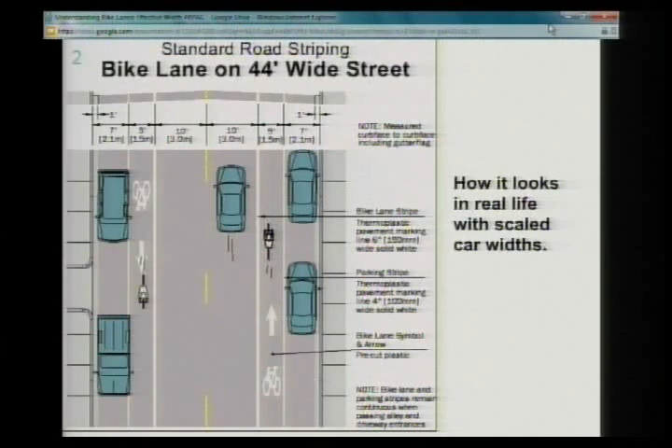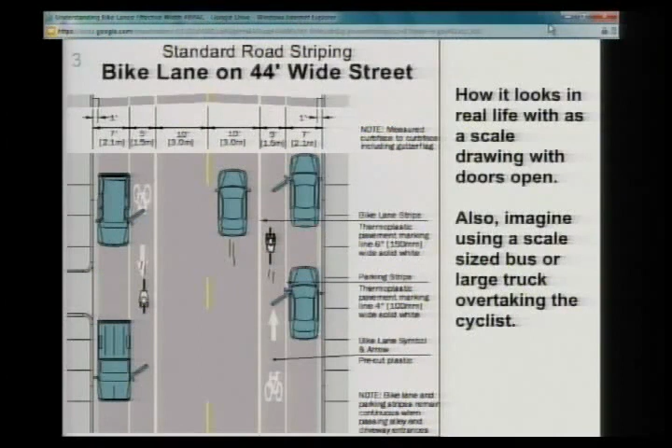I'll go back to how it looks in the guide. What does it look like in real life? The cars are made about 80% too narrow in the guide. By intention, or I don't know why, but that's how it is. If you now open up the doors, you see this, which really doesn't look so good. So you can start with this and say, well, that's a lot of room there. That looks pretty fine. Then you put it out here, and then you put the bike lanes in, and it turns out like this, and it doesn't look so good. This is the AASHTO. The AASHTO also has non-scale drawings. This is the same. They're talking about a minimum.

They give a minimum 7, 5, 10 bike lane. Looks like it has plenty of room, but it's non-scale. The parking lane could be 7 or 8 feet, the bike lane could be 5 to 7. They don't even specify the travel lanes, those could be maybe 12 feet wide. Looks great, oodles of room.

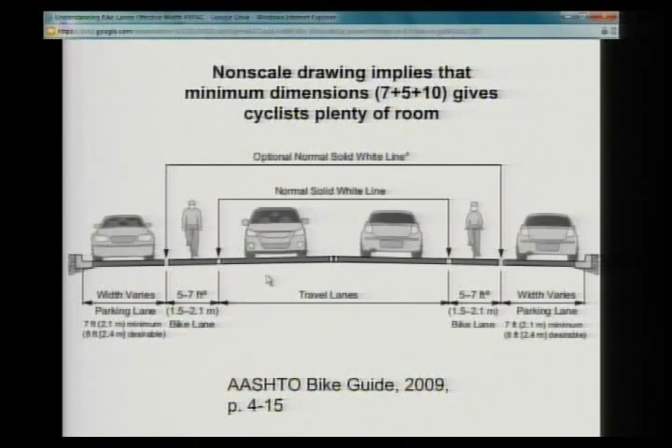But if you actually set up their minimum 7, 5, 10, now why did it do that? I'm going to touch that again. 7, 5, 10, it doesn't look like that at all.

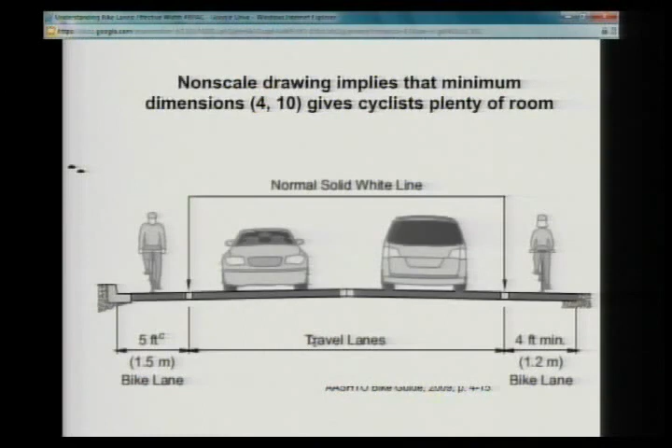This is another situation where they're looking at 5 foot on one side, no parking for on the other. Curious that the 4 feet on the right side look exactly the same as the 5 feet on the other side, which gives it a clue that this is not to scale. And the travel lanes look huge, probably 12 feet here. Looks like a lot of room. This is not a scale drawing.

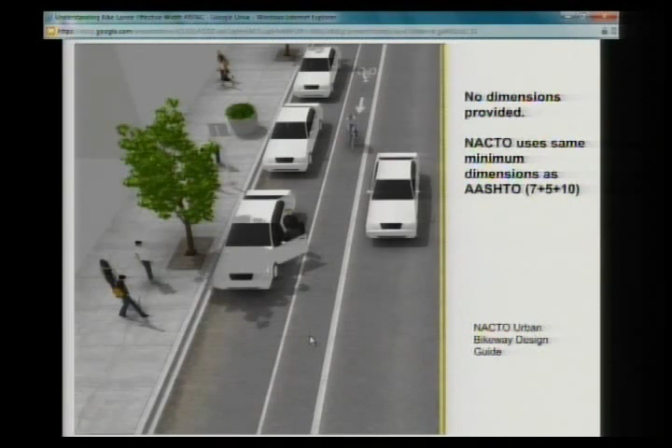This is one of their drawings. Again, they have the same minimum 7, 5, 10, and they give you this drawing, but they don't tell you how wide anything is. And if you go ahead and put in 7, 5, 10, you may be surprised to see that the door actually covers most of the bike lane. So it's really interesting to see that these guides are not to scale. They don't give a good representation of what it looks like on the ground.

What does a scale drawing look like? Well, this is some basic stuff that you need to know to design this stuff. How wide are the lanes? How do they compare to different types of motor vehicles, a mini, SUV, a truck or a bus? How wide is a bicyclist?

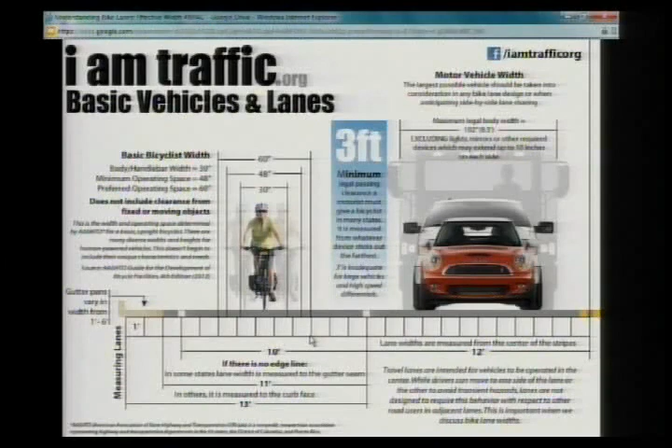AASHTO says that a bicyclist should be 4 feet wide operating room minimum, 5 feet recommended. And if you think about a bicycle being 30 inches wide physically, 4 feet gives you 9-inch wiggle room on each side, which is not a lot of room, even at 4 feet minimum. And they're saying 5. So this gives you some idea of what it looks like when you actually have things to scale. So what does this mean now?

Take a scale drawing of Illinois Street. This is Illinois Street: 7-foot parking, 5-foot bike lane, 10-foot travel lane.

We're going to call the door zone both the strike zone where the door opens, and we'll call the startle zone another 1.5 to 2 feet or so, where even if the door doesn't hit you, you're going to swerve out of the way. A cyclist was killed this summer in Chicago. The door never touched him, he swerved out, got under a truck, and was killed.

So the whole door zone can be pretty wide, about 11 feet will get you out of the door zone. If you look at the general use travel lane, and if you wanted to be 3 feet away from the largest vehicles, you can see that that 3 feet is putting you, there's no room between the two. I mean, there is no room between the 3 feet close passing zone and the door zone.

So if we had looked at something like this, we may not have been so surprised at Illinois, having to ride right on this line to get out of the door zone, and then you don't have any room for close passing. You don't get the 3 feet.

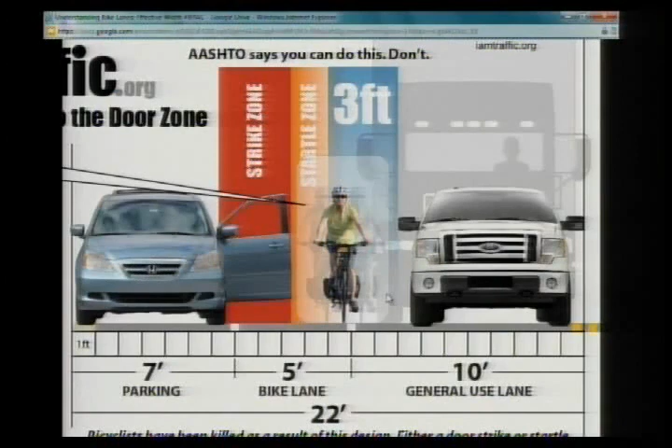So here's the parable. Moses is a graduate student doing civil engineering at University of Illinois, and he comes down because he's heard that it's a good place to ride a bicycle, right? So what Moses does is ride to campus on Illinois Street, east of Lincoln, and he gets to Lincoln, crosses Lincoln, and what does he see? He sees the bike lane, right?

He goes, wow, this is cool, I got a bike lane, this is my own special spot. He's going along, and he's figuring that this is going to be cool. Further down the bike lane, he sees somebody come out of the car, and that door covers almost completely the whole bike lane.

Closing it, he goes, whoa, I guess I need to be worried about doors opening. So Moses says, okay, I'll move over to the left side, stay out of that. Bus comes by him within 1.5 feet, okay? Not fast, but he comes by. Whoa, I see there's things on that side.

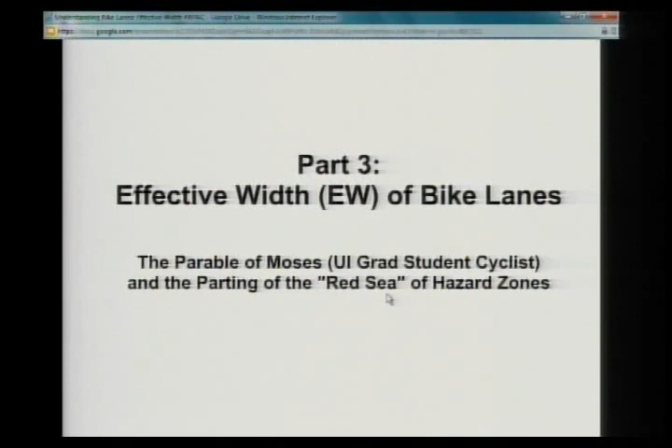So this guy is an engineer, or going to be an engineer, and he says, I want to figure out what's going on here. My expectation is that if I'm in the center of the lane, I should be relatively free of these types of hazards. So let me figure out how much these hazards come in on me. So he looks at this.

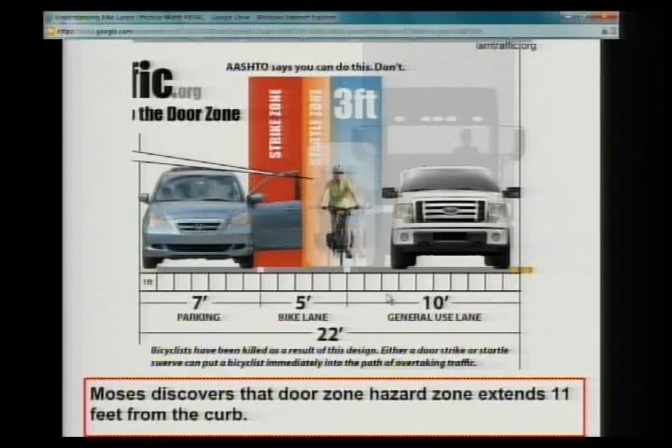Moses discovers that the door zone hazard extends 11 feet from the curb. He looks up the width of cars and vehicles, and does all this stuff. He's a smart guy, he knows how to add and subtract. Not too hard, 7 feet.

He looks at the close passing zone. He finds some scale drawings or does measurements and says, wow, so you actually have that 3-foot distance, right? This close passing zone extends 11 to 13 feet from the travel lane left stripe. So that is, motorists need their own space of at least 11 feet for cars and SUVs, to 13 feet for larger vehicles, to pass cyclists within a margin of 3 feet. They're going to need that much room.

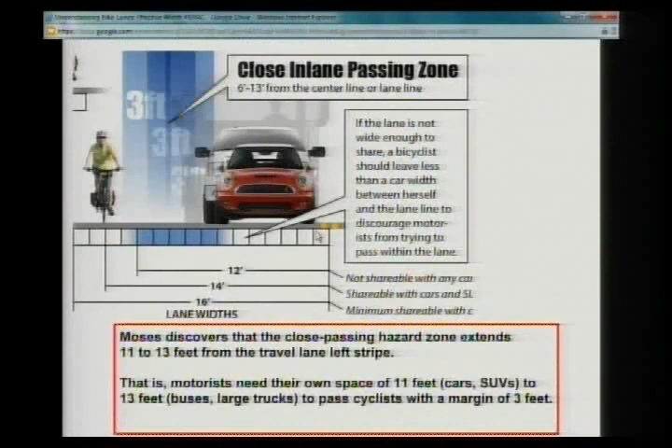So that's what we're showing here. You have to be actually outside of 13 feet if you want to be outside the close passing, or 3-foot passing, for a large vehicle who is right up against the left side of the lane. Okay, so Moses figures this out.

Then he looks at this, to show you that it is really tight there. So here's a bus in the center of the travel lane, and the only room next to him is that 5-foot bike lane. So if you're in the middle of the bike lane, you don't have 3 feet. Now, do you really need 3 feet all the time? If it's really slow, maybe not. But that's the Illinois minimum safe passing distance, minimum 3 feet.

So he figures this out, and he says, okay, I'm going down. On my right, I have the door, right? Where does that come out? Okay, that comes out 11 feet. On my left, there are buses. Where does that come from the left? 13 feet.

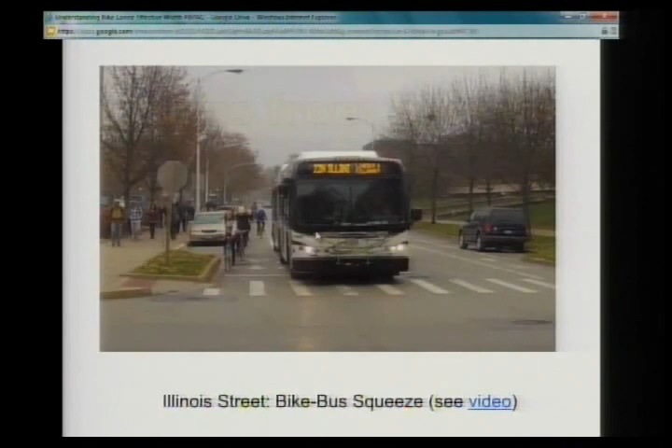There you are, right? Why do we call him Moses? He doesn't approve, he wants to part the Red Sea, right? He doesn't like this, he wants some clear space between the two. So that's what Moses likes.

So he then comes up, well, I'm Moses now, and he comes up with a spreadsheet to see how this actually works out.

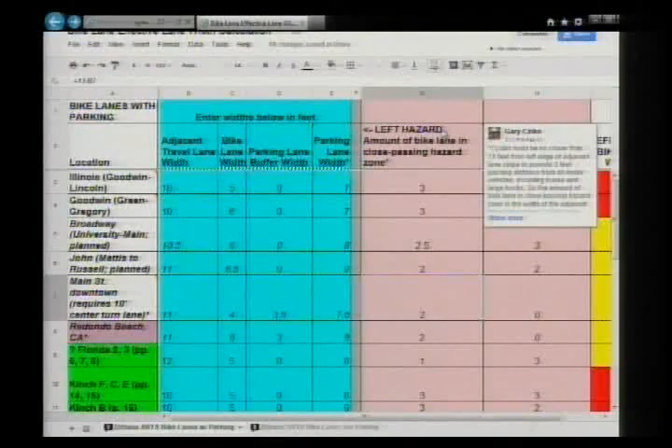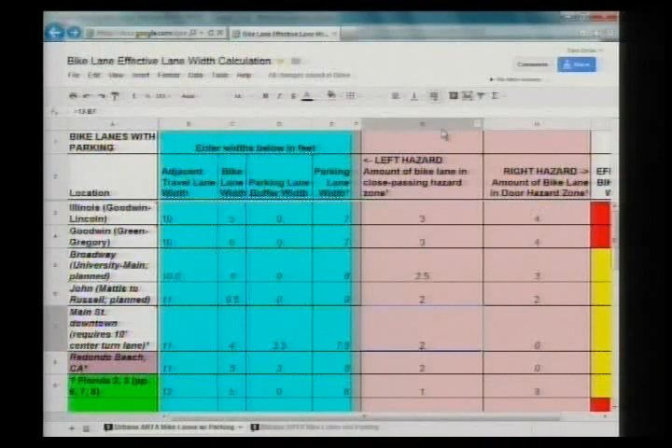I think this works by hovering like that and going like that. So what you can actually do, and it's a little bit too big, we're not getting the whole thing here. So what can I do for that? Idea, somebody? F11? F11 is going to... again? So how do I just make it smaller, smaller, smaller? Control, well, you mean F9 or Control 9? Control minus. Oh, Control minus, sorry. Okay, that's kind of small. Can you still see that?

Yeah, okay. So if you actually put this spreadsheet together, we have the bike lane width we enter right here. We put the adjacent travel lane width next to it. We put any parking lane buffer. We put the parking lane width on the right side, okay.

So what is this left hazard? The left hazard is we need this 11 feet, all right? So, sorry, that's the left hazard. Do I got this right? Sorry, that's the 13 feet, right? We need 13 feet from passing traffic.

How much do we have in the travel lane? 10. We need 3 more, right? So this 3 is going to intrude on the left side of the bike lane. If we look at the other side, we need 11 feet from the curb. What does the parking lane give us? 7. We need 4 more.

Comes at 3 feet on the left side from close passing traffic. We need, from the other side, we're losing 4 feet. The bike lane is how wide? 5. If we subtract 7 from 5, we get -2. That's the overlap in those 2 zones.

So you can put these numbers in, look at it. If we look at Goodwin, it has -1. It's a little bit better. Why? Because the bike lane is a foot wider. If we look at Broadway, this is being planned now with a 10.5-foot travel lane, 6-foot bike lane, 8-foot parking lane.

That's kind of fun. So what does this mean now? If I can get this - where is the other window now?

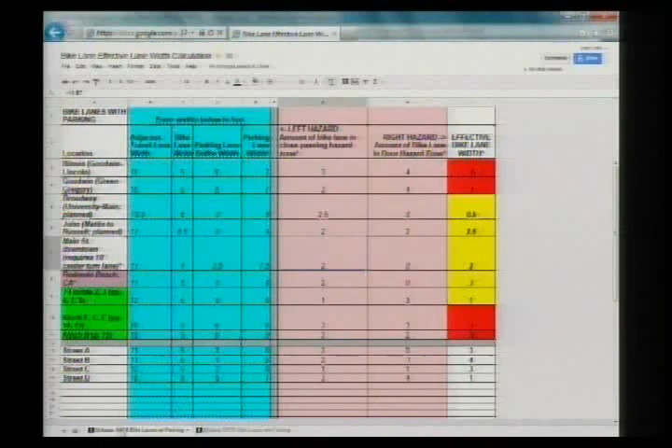Somebody? I won't do this again. I'll stick with my Mac.

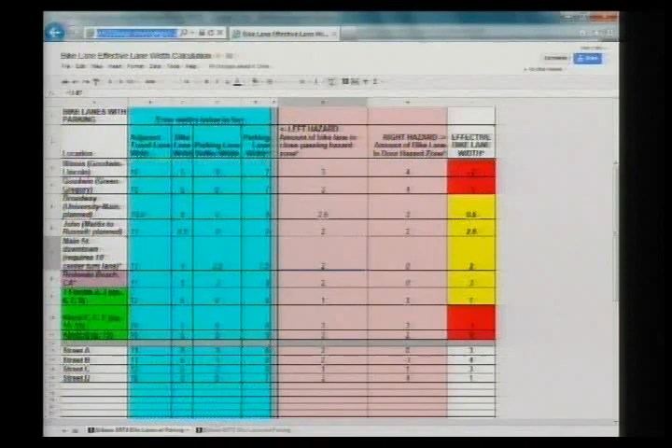Okay, I can just get rid of this one, and it should show up. Okay, so we have that. Thank you very much. So what does this mean?

So what are we going to do with this more scaled, detailed view of bike lanes to see how they actually relate to reality? Are we going to continue to install these double hazard lanes with zero or minimal effective width? Or are we going to look at some other types of infrastructure that creates a more pleasant, less intimidating environment without marginalizing cyclists or directing them to ride in these hazard zones?

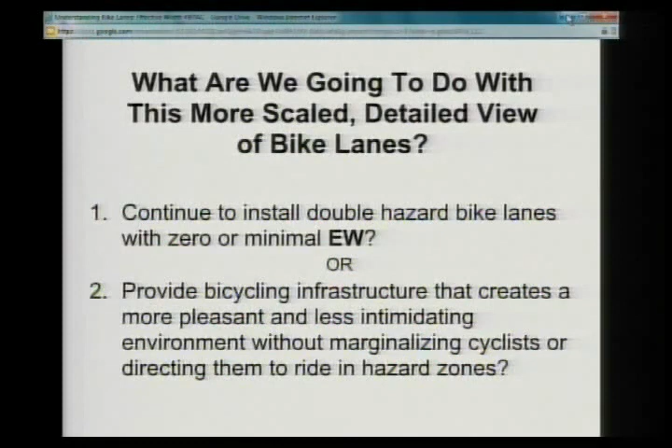This is the type of thing that I think we could do downtown Urbana. Maybe not as much room as this, but close to this, getting people out of the door zone and giving them a couple of feet in the red zone there that they can come through.

What's really nice about that design is that you can pull that buffer away before intersections. Motorists will then be encouraged to go into that lane and merge in to make that right turn. The reason that motorists don't go into bike lanes as they're supposed to when making a right turn is it looks like a shoulder. It's only 3 or 4 feet, right?

It doesn't look very inviting. But if you make that wide, that's one of the advantages. So this is something that could be done here.

We have all these 3- and 4-lane streets coming right downtown. Things like Illinois, or Elm, where there are 2 lanes and they widen to 4 and they go back to 2. Even Main Street and Race. Why not put Sharrows on those right lanes? This is right downtown. It would be great for cyclists and make a statement.

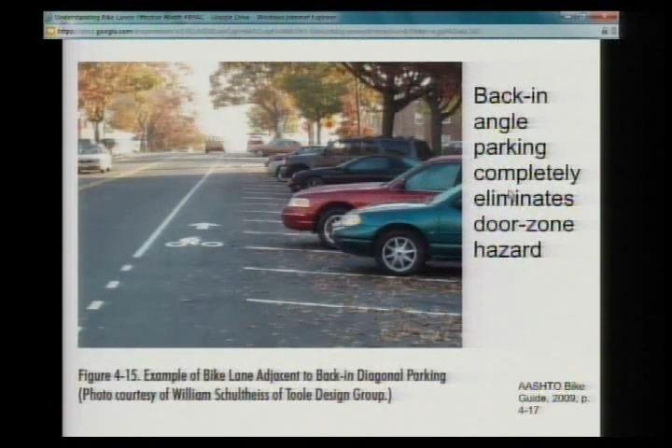Cyclists and motorists can see each other. No door zone. You can remove parking from one side and see if you can actually improve it. I actually consider the door zone more of a problem than the close passing zone, because with the close passing zone, the motorists are seeing you. They may try to squeeze by, which could be dangerous, but they see you. People opening doors don't see you.

Contraflow bike lane: take a two-way street, make it one way. Now, campus is going to be doing this on a number of streets. I think Daniel will have a contraflow bike lane. We should have them on all of them.

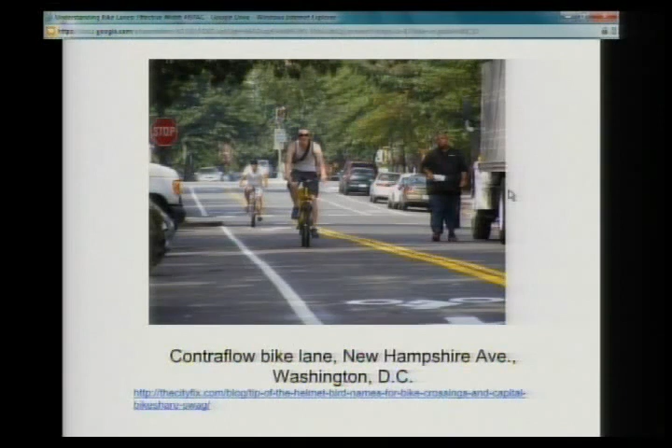You put in a one-way street, I will guarantee cyclists will go the wrong way. They will not go out of their way one block to avoid that street. Motorists do not go the wrong way on one-way streets because they know they can hit bicyclists. So think about making streets one way with a counterflow bike lane, and we get more room that way.

We were talking about this on Green Street between Wright and Lincoln. I don't even know what's happened to that now. They're either still thinking of it, or they're not going to do it. But whether or not, we can come back to that.

Let's make some connections. There are a few places where connections can make a big difference. Now, this is Cynthia's probably least favorite place, University Avenue. This is my second least favorite place to ride a bicycle, going to the MTD offices on University.

40 miles an hour, I can do it, but the only thing I like less than this is Springfield, West Springfield, with 2 lanes and gravel shoulders and trucks coming through. Now, if you go on North Cottage Grove, you can make a little connection across there. Now all these employees can get to MTD without having to go on University.

It's already done at Carl. They have a crossing on Carl on exactly the same rail line. Well, whatever. This may not be the ideal one, but there may be ways to provide access like this. Connections are important. And connections between 2 streets that may have a cul-de-sac, and they can make them come through, things that we can look at.

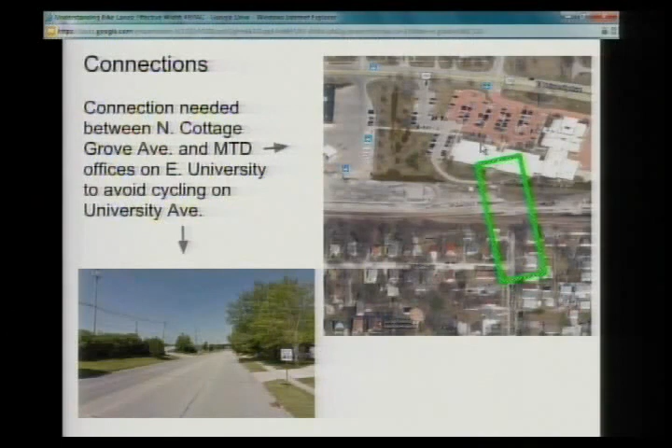This is really my favorite. This is a bicycle boulevard in Berkeley, California. This is really clever. They have this obstruction here, and that prevents cars from coming through, but emergency vehicles have enough clearance to go right through that. So these are streets that you cannot go through, low speed, very low volume, and people just use this.

You see kids, you see everybody just taking over these streets. It's sort of like a ciclovía all the time on these particular streets. People have local access, and the people living there love them. We need some bicycle boulevards. Do they have any issues with people hitting that little curb in the middle? Well, if you see a do not enter with a $75 fine, it should say $75 fine plus repairs.

You mean a cyclist, with a bike? We've actually had complaints from people that were biking accessing our sidewalk ramps where they hit the curbing on the ADA accessible ramps. We've actually had people complain that they didn't feel the curbing was visible enough when they came up. Yeah, and there's a couple of bad places where it's not visible enough.

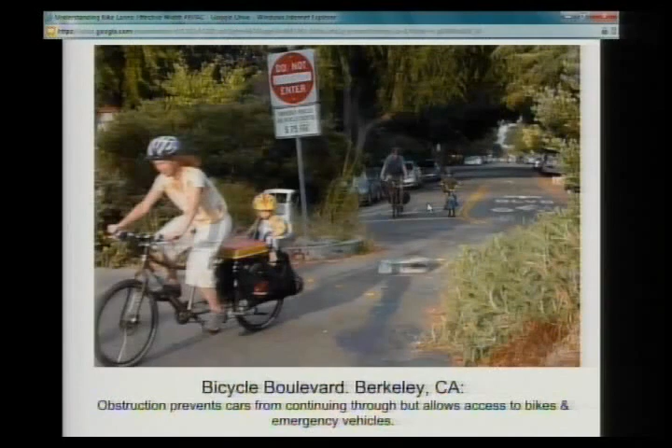Yeah, I mean, you don't necessarily need to have the obstruction. I don't know if Portland uses them, but anyway, they're told the cars are not allowed to go through. You could make it just sort of narrower if you don't want emergency vehicle access as well. But this is something that we could be looking at as well. So what's the bottom line?

Really, I think that when we're considering bike lanes, I'd like to look at this effective width for all of the ones that we look at and see if we can do something to have Moses approach, right? That means to part the two hazard zones here, okay? And you can use the spreadsheet to put the numbers in. You can widen the bike lane, but without narrowing the travel lane, because if you narrow the travel lane, you haven't done anything to get away from the close passing.

You can widen the travel lane from 10 to 11 or 12 feet without narrowing the bike lane. That will give you some more. You could provide a right side buffer against parking or a curb edge without narrowing the parking lane. You could remove parallel parking, replace it with back-in diagonal, take it off one side. I talked about contraflow as a possibility. If you can't do any of those things, then I think it makes sense to provide sharrows on that particular street or look at some of the other alternatives that we've been looking at.

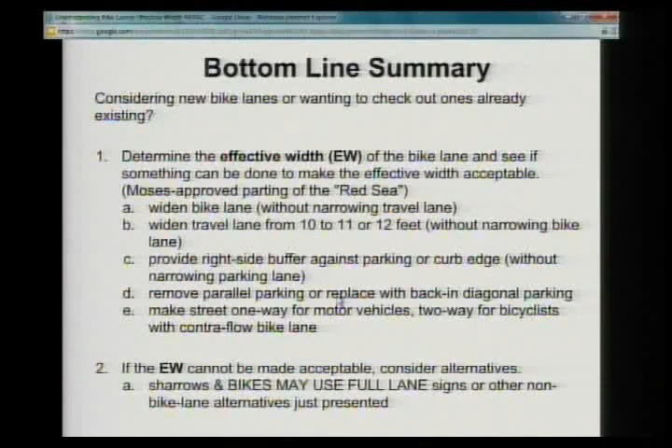So basically, this is a summary of the idea. The effective width should be considered when we're looking at bike lanes. You subtract from the painted lane width. The left hazard is the close passing zone. You look at how wide is the travel lane. You subtract that from 13. That tells you how much you're coming in from the left.

The right hazard is the door zone. How wide is the parking? You subtract your parking from 11. That's how far it's coming in from the right. If there's no parking, you use the edge hazard zone instead, 2. And that's how you get Illinois, 5 minus 3 plus 4 minus 2, Race Street

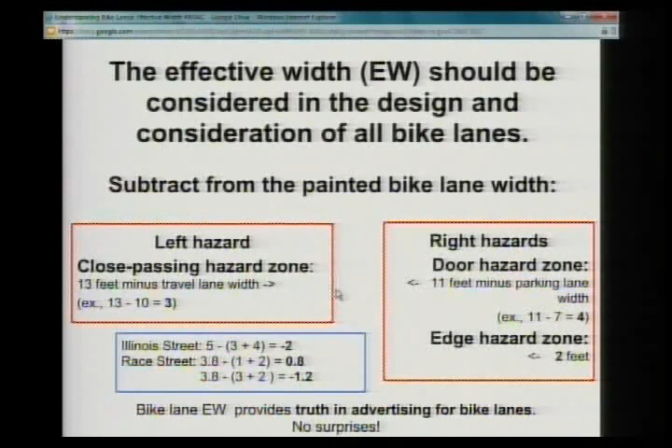0.8 and minus 1.2. So I think this sort of provides a bit of truth in advertising for bike lanes, and there's no surprise. So I'm offering you this metric, and I'd like to see us use this to give us a more reality-based view of what we're doing. Any questions? Any questions for Gary?

Sorry? The edge hazard zone. Yes? 2 foot. Is that everywhere? Well, I'm putting it in here because there's a lot of stuff that happens at the edge. I mean, that's where you get glass and you get debris. That's where you get ice. That's where you get snow.

And, I mean, if you had a street where the gutter seam comes out, and from that point the pavement is in great condition, right? And the city's going to maintain it and sweep it and make sure there's no ice or snow there, you might say we don't need that 2 feet on the right. So it sort of depends. But that's typically not the case.

And one of the things with bike lanes is that because there's no motor traffic there, everything tends to get swept into the bike lanes. That's where you get your flats and all these other things. But if that's not the case for some reason, you can take away that edge hazard zone if you want. But my basic calculation, I would say if you're going to do that, then call it an adjusted effective width. And then I'll say, well, what's adjusted for? We have a fantastic edge there. We don't need to take off the 2 feet.

You could adjust the travel side too, right? You can do this side, the 13 minus 10. It could be 11 minus 10 if there's no trucks and there's no buses, right? You could get rid of that too. If you have a parking lane and there's virtually nobody ever there, there's no door zone, right? Get rid of the door zone. You don't have to worry about it.

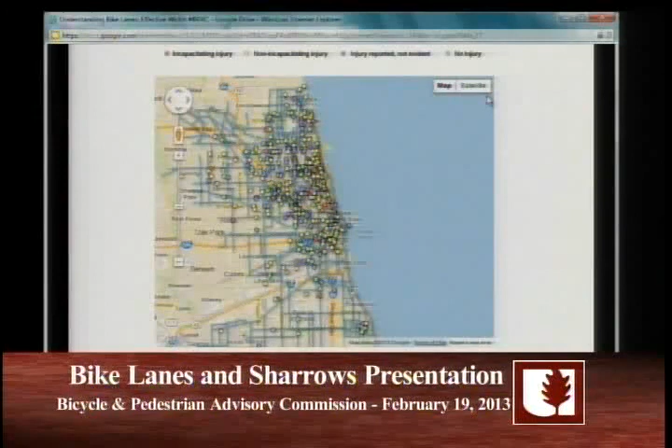Two responses to that. This is Chicago for about a year and a half. Now, I don't know whether there were bike lanes or not on this. Well, most of them are not. Another thing is I know that someone was doored on Pennsylvania and had a pretty nasty fall. I've tried to find out if that was reported to the UI police, and I have not gotten anything back yet.

I filed freedom of information, and nobody, you can't even call them and find out if they're working on your request. And I spent some time, I don't know if they're being reported or not. A third thing, Cynthia talks about moving a little bit further away.

Door zones are interesting. If somebody's going to open the door in front of me, and I'm going to hit the door, where do I want to hit it? Smack straight on. There's a spring. It's going to hurt, right? What's the alternative? My right handlebar, 1 inch. What happens when I hit that door? Here, I'm thrown into the travel lane. That's how people get killed.

So just being a little further from the door zone doesn't hack it. You got to be out of it. And even if you're a foot away, up in Chicago this summer, door opens, you swerve, you can die. So it's just not being a little bit away. That's the hazard that I really don't like. And it is a problem. I mean, they're collecting the data in Chicago, and I don't know what's going on here.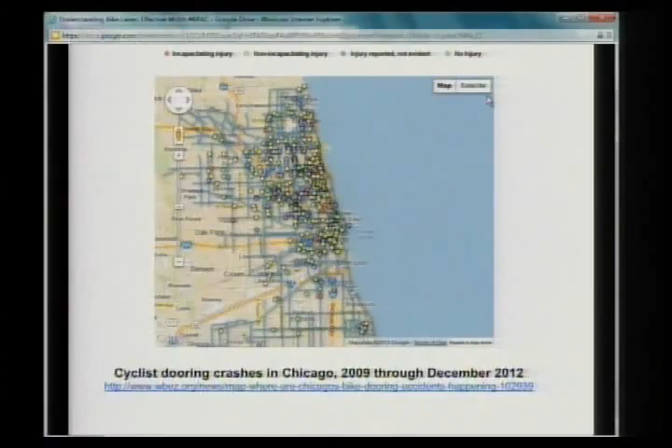So here's a question for you. I think this effective width is one interesting measurement to look at in comparing what streets are bike lanes spacious enough to be safe versus too cramped to be safe. But I wonder, what's your opinion on how we weigh these different factors?

So on the one hand, the risk of the door zone is one that you've talked a lot about. But on the other hand, if you move to a Sharrow instead in order to eliminate the risk of the door zone, it seems to me Sharrows have all kinds of downsides as well, including the whole concept of cyclists reporting on surveys that they feel safe in bike lanes, and that then more of them cycle, and then there's some critical mass of more cyclists, which has a positive effect on making the road in the door zone safer. Which makes them all safer. Okay, explain that to me.

Well, one of the concerns that I have about what is recommended sometimes is that we know from a lot of data that narrower travel lanes slow vehicles. That was part of what was done on Illinois. It was a road diet. And so the slowing of vehicle speeds results in higher safety and fewer crashes for all roadway users.

So the original design that Gary showed of what they did in Chicago, they had to collect data on it because IDOT did not want bike lanes in Chicago. So they collected data on those streets, and what they found was not only were there fewer bicycle crashes, there were fewer crashes of all kinds, vehicle on vehicle, vehicle and pedestrian, because when you slow the vehicles, you reduce the crash rate and you reduce the crash severity.

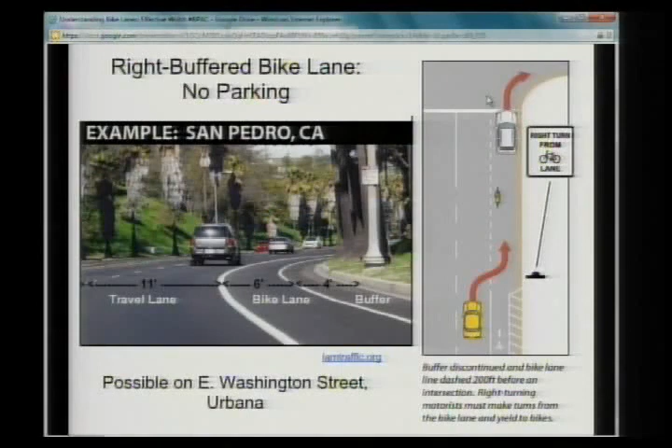Yeah, a lot of these pictures are from California. I mean, we're lucky to get more than a year out of a pavement marking. Yeah. The freeze thaw, the periods of heavy rainfall that we get, and the summer heat, they just seem to wear out pretty quickly.

But see, another thing, just look at this one, for example. If you can't put that extra line there, right, that marks the buffer. Now, this was done really early. They haven't even put the bike symbols in here yet, it seems. You could eliminate that. I don't like it as much, but you could eliminate that and put your symbols right up against the left side.

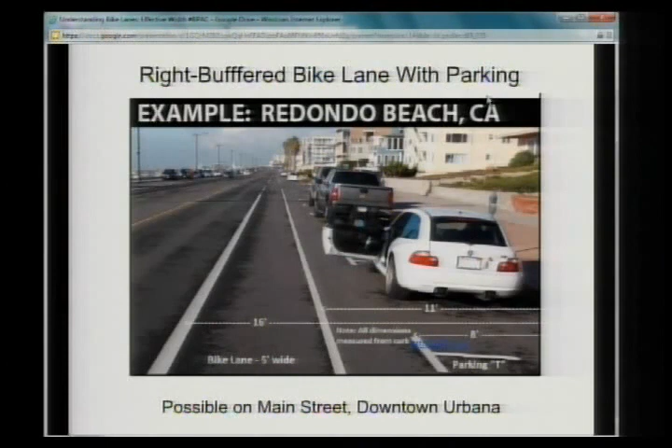So at least you're indicating that this is where bicyclists are expected. I like the line better because it's very clear, and there you have your free zone. But it doesn't necessarily have to mean a whole lot more paint. And the research that I've seen too says that having a narrow parking lane encourages motorists to park closer to the curb. If you make the parking lane too wide, they park farther out. So they're using those lines to estimate where they're supposed to be as well.

Okay, any other comments on this one before we move on? Okay, so there's two good handouts, and people should look over those, consider these questions, and we'll be returning to this topic, especially over the coming months as we get more into planning for the future. And one of those streets that Gary had mentioned was Main Street. That's our next topic tonight. So we're going to move on to the Main Street bike lane design.

And Gail Jamison is here. Most people might not know Gail, who is the Assistant Director of Public Works and is kind of in charge of all the engineers who stay in the office and do all the drawings and plan out all these projects, people like Brad and the crew there. So, Gail, welcome to the Bike Commission.

Hi there. I'm actually Assistant City Engineer. We don't have an Assistant Public Works Director. Yes, okay, that's right, the official title. That's okay. I'll take the promotion if you'd like to give it to me. I don't know if there's a pay increase that comes with my mistake, though.

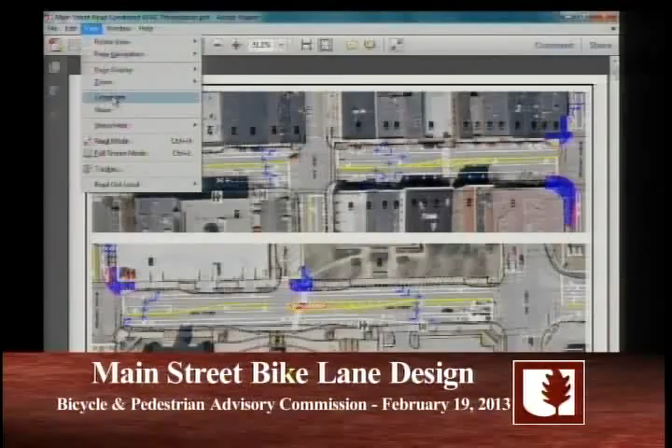So. Well, before I get into all the pretty pictures, if I can figure out how to operate this thing. I want to go to full screen. Where's it at? View. Full screen mode. There we go.

Before I get into the pictures, I want to go over a little update as to where we are with Main Street, and maybe even do a little history. The Main Street concept of a road diet started back in 2007, as part of the deliberations and the development of the Bike Master Plan, and it was included in the Bike Master Plan with bike lanes and a 3-lane cross-section, or road diet cross-section. The master plan was adopted as part of the comp plan in April 2008.

We did an ITEP application in 2008 for the project, and we weren't successful on that application, but in 2010 we did an ITEP application and were successful in getting $625,000 towards that section of the road diet from Grove Street east to Dewey Street. ITEP is Illinois Transportation Enhancement Program, for those who are not familiar with some of the acronyms. We did an HSIP, which is Highway Safety Improvement Program, for Race and Main Street,

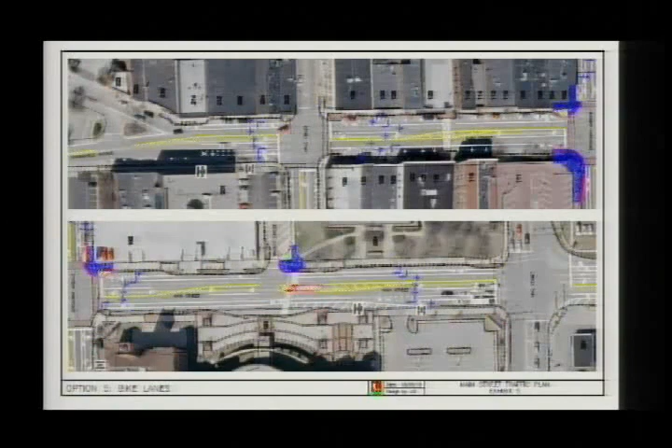The next section starts at Grove Street going east, and you see a lot of sidewalk work was proposed at that time, along with a lot of ramp work. A lot of brick sidewalk was being replaced with brick where residents wanted it; if they didn't want brick, we went with concrete replacement, making everything pretty much ADA compliant throughout this whole route. That was part of what was eligible for grant funding — getting ADA compliance for pedestrians plus the bike lane improvements.

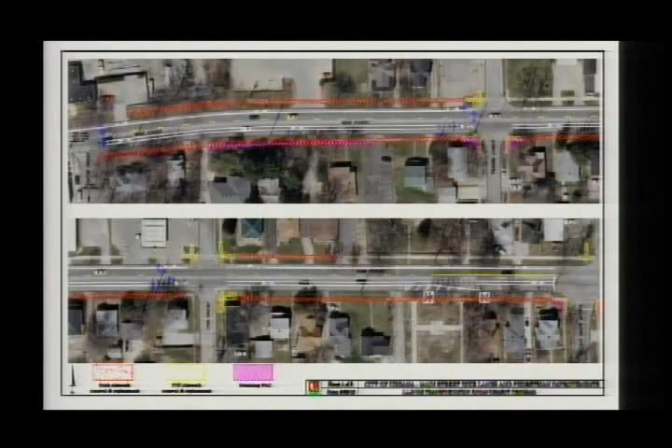As you can see, this goes to Cottage Grove in this particular set of slides. The next one is east of Cottage Grove. As you get out into the area near the county complex, we were basically just going with a three-lane section. The brick sidewalks continue on the south side, and on the north side they stop near Glover, just across from the VFW there.

As we continue, there's Lierman Avenue on this set of photos, and you can see the bike lanes continuing. Jennifer had proposed a striped median as we got out in this section. Then as we head farther east towards the east end of the project, we're still doing a three-lane section with a rumble strip median in that area, which we propose to remove. You also see a multi-use pathway along the Park District in that stretch.

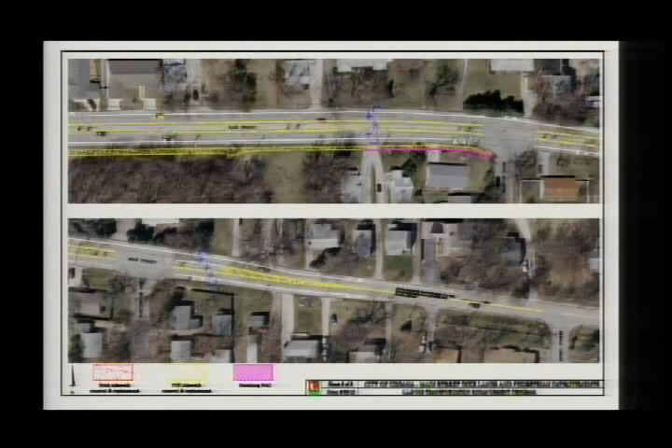As you continue on, the sidewalk would end at Dodson Drive. You can see we're continuing the bike lanes all the way out past Scottswood, and then we blend in and go to shared use on the pavement all the way out to University Avenue, transitioning at that point.

Some of the things have changed in the design, so I'm going to go through some of these plan sheets and point out what's changed as we went along and learned a little bit about the design. This is the Race Street and Main Street intersection.

We took the median out, and we were concerned about Busey Bank's entrance to their parking lot. We didn't want vehicles exiting that close to the intersection and trying to make that left turn across there. So we worked with Busey, and they were willing to let us create a bump out, which narrows the section a little and makes it right-in-only, no exit out of that parking lot on that end.

At the same time, we took a parking space out on the north side because we wanted to try and square up that crosswalk in the narrower section. We extended a bump out farther to the west so we could tie that crosswalk in and make it more at a 90 degree angle—right now it cuts across at an angle because of the offset in the intersection. And here's Busey's right-in, right-out that we created on that end.

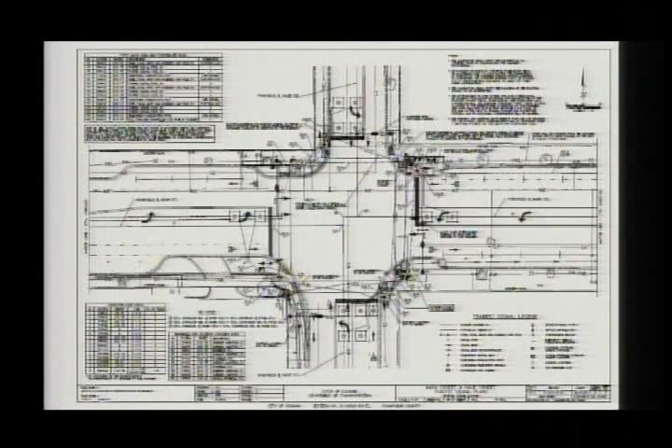This shows a little more of what we're proposing with ramp work and the crosswalk changing over on this corner. These two corners here were done as part of the streetscape work, and the ramps are ADA compliant, so we're not touching those two corners with any of the work, but we're redoing these two corners here.

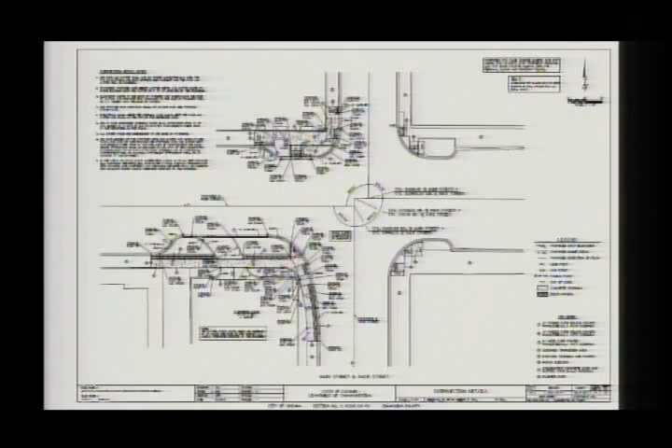This is the Broadway Avenue intersection. Jennifer had shown bump outs on the corners in Broadway, so we're doing bump outs and redoing the ramps. We're getting rid of the slick brick on these corners and putting concrete in, matching the streetscape as we have everywhere else along here, and then redoing the ramps to be ADA compliant.

Here again, we are not proposing any loops for the signals east and west—the lights will dwell on Main Street. So we're going to put bike loops on both the north and south legs of Broadway in the bike lanes too. The dwell means it'll just stay green on Main Street on Broadway unless there's a call from the adjacent minor streets, and Broadway's a minor street in this particular scheme.

When a car would come up on the loops on Broadway, they would call for the signal, and then it would cycle through. Same thing with the bikes. It would come up on Broadway, but normally it'll dwell on green on the main street.

So, Gail, are you saying there's a special kind of detection for the bicycles, or is it just an additional detector? We're going to use a bike loop. It's a special configuration of loops.

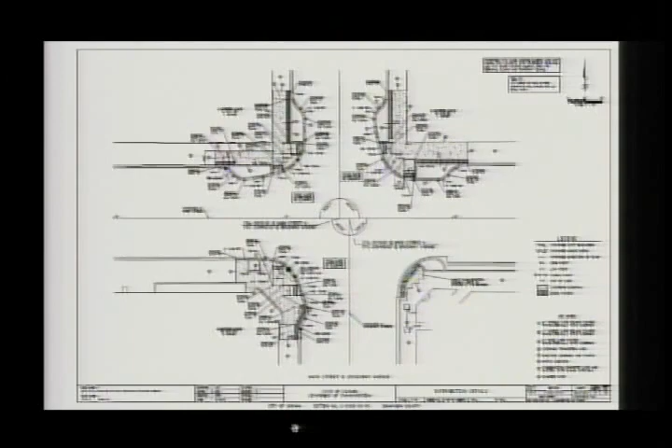So we could put the symbol for where that is for left-turning vehicles over the vehicle line. I'm not an expert on that, so I don't know the answer, but I can definitely find out for you and let you know.

This section here is basically looking at the pavement markings that'll go along this section between Cedar Street, which is right here, and Vine Street in this section. As you can see, we start the bike lanes at Cedar. It's a dashed line that goes into the bike lanes, starting right about here after the Y.

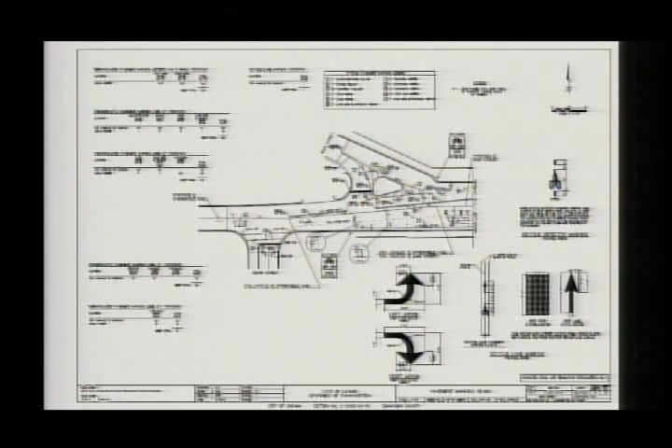And that bike lane then continues outside here, outside the right turn to Busey, and here's the bike lane on this side going that direction. This is where it starts breaking into the dash line, and the bike then would go back in to share the lanes or share the roadway west of there.

Until we do something different with Springfield Avenue and Main Street, there's not room enough to have bike lanes on those streets with the buses, the biking, and the parking there. We're going to redo the crosswalk here at mid-block and restripe it. We've got 3 lanes here, and I know we've got 11-foot travel lanes. And I was trying to...

Will we have the signs that say stop for pedestrians here as well? Because no one stops for pedestrians there currently, at the mid-block crossing. We should have some signs there. If they're not there now, we will have some. We can put signs there.

So basically, you've got your left turn lane here and left turn lane here. They are opposite each other so that they don't block the view of the through lanes. I'm just talking to Ms. Charlie a little bit, and we can look at narrowing the through lanes and turn lanes here to give a little more room to the bikes and maybe give a better width there.

I said these are done, but we can change that during construction. It's not going to affect the bid price because the amount of paint on the pavement is the same.

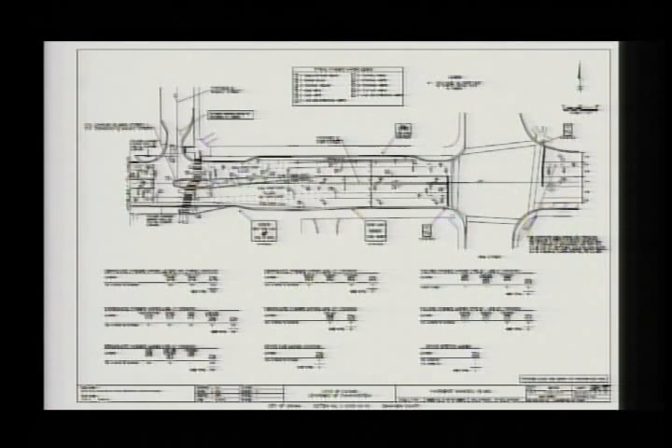And here again, we may have the same issue with left turns as you have back on the other streets, and we can look at that. Yeah, okay. Yeah, they turn. Yeah, okay.

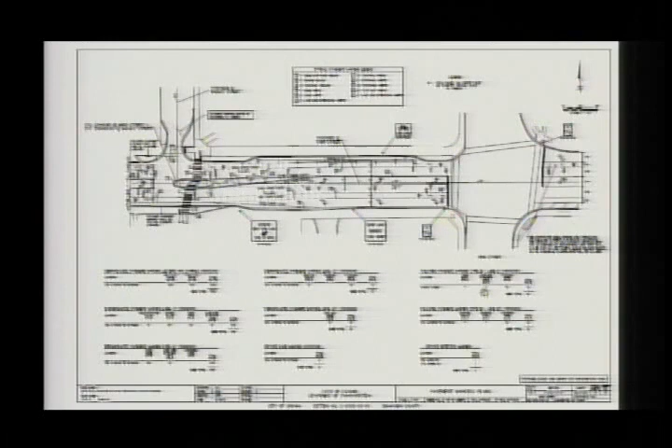This is the ITEP portion. It starts just at Grove Street here, actually a little bit west of Grove, over towards Maple Street, and it goes to the east. We've eliminated parking on the north side, even though we haven't posted it yet. In 2010, the council voted to remove the parking. We've just been holding off on this project to actually post it. We'll have parking on the south side, we'll shift the center line of the street over, and we'll have three lanes.

We've lengthened some of these dash zones at the various streets to give drivers more evidence that they can cross there. Where they're real short, they won't cross them, but we've made the dashes longer in some of these sections. Also, for the buses, the 100 feet so they can really pull over is important. Yeah, and we lengthened that in most of these areas. We see they're a lot longer here at Lynn Street. These are, I think, over 100 feet, maybe 110 feet or so. They may be 200 feet, I don't know what the distance is here. What's the scale here, an inch to... yeah, I think they're about 100 feet. If you put 200 feet at these intersections, you're just dashing the lines all the way from one corner to the other.

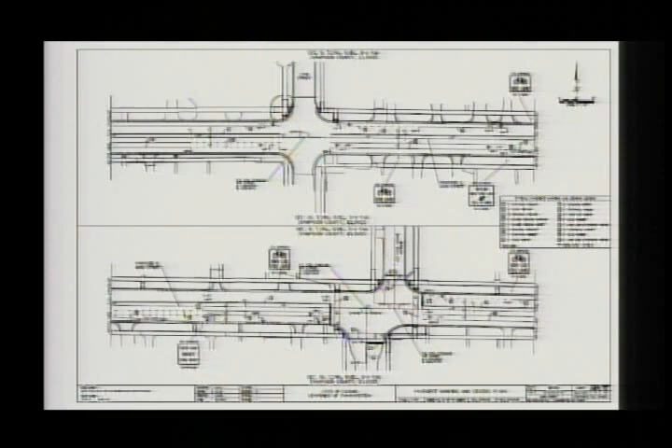I hope you guys can see this on your monitors there. It's pretty small on this one.

Then we go to, here's Poplar Street. Poplar Street goes north there. There's Glover. We're carrying the bike lanes along, and we still got parking to just west of Glover on the south side. There's a stretch between Poplar and just west of Cottage Grove where there's no parking because of the turn lanes. So we're carrying that parking through.

Then we get to Hardall. Still, again, we got the two lanes with a little striped median and the bike lanes along the edge. There's no parking east of Cottage Grove or east of Glover on either side of the street. So as you come across, there's railroad tracks there, and you've got the two lanes with the bike lanes. There's no left turn lane in this stretch because it wasn't wide enough to get the left turn lanes in here. The left turn lanes start up again basically east of Lierman.

Here at Lierman, we've done something a little bit different. Rather than carry the bike lanes along the side of the right turn lane, we basically drop the bike lanes back here, dash the line, and then we put sharrows in the right turn lane. The bicyclists, when they go through this intersection, rather than having a bike lane to ride in next to the cars, will actually move over and share the right turn lane with the right turning vehicles.

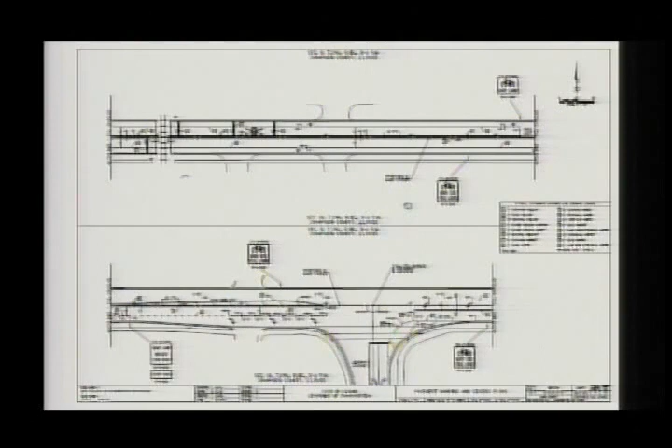Well, our consultant debated it with IDOT, and they've signed off on it, so we're doing it that way. But then you'd be encouraging cyclists to do something illegal, which is to continue through on right turn lanes. So I'm opposed to that. Why couldn't it be in the through lane instead? The sharrows could be in the through lane. The volume's pretty low there. Because you're moving the bikes across the right turners, so we're keeping the bikes with the right turners. They can ride to the left. That's where the sharrows were at. They're on the left edge of this lane. They ride through on the left, and then they merge back into the bike lanes on the far side of Lierman.

When we discussed it on John Street, there was a concern about people being confused, and I think if we do it without any additional signage... So you have the right turn lane, must turn right except bikes. Yeah, so we've got the signage there. And we put the sharrows over to the left of that lane so that they would ride to the left side of that lane. And that lines up with the bike lanes on the far side.

And this right turn lane is mostly heavily used when there are shift changes? That was my impression, that there's shift work at the factory? At the factory, yeah, it's not used very much other than at those times. So this was part of your thinking on allowing the bicyclists, and also because it lines up with the bike lane on the other side. Right, and we looked at the standards, and the design is allowed with the standards. Okay. And maybe that signage helps make it legal or clarify.

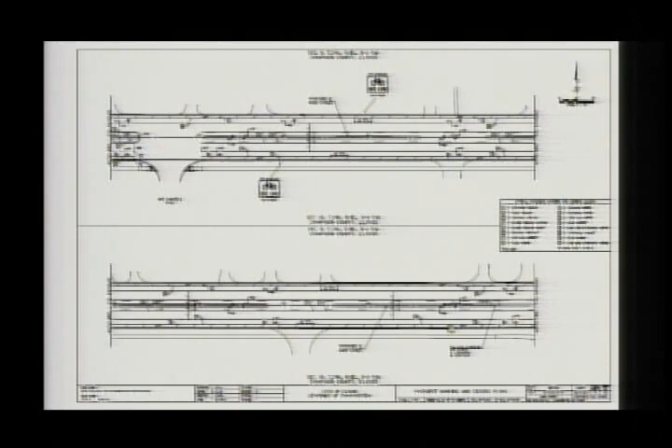We've got Brad's crosshatches that he doesn't like in there, but we're right buffering both lanes in that stretch, and basically did that by getting rid of the wider lanes out there. So we have right buffer on that. There's no parking there, but it allows a little more room for the bikes to get away from the cars if they hear one approaching from behind them.

Here's one major difference: originally we showed a nice straight path right along the right-of-way in the Park District. We couldn't get right-of-way from the Park District, so we worked an agreement and an easement with them. They wanted a path to be more in concert with their pathways that they proposed in their master plan. So we actually meander in and out a little bit into the Park District.

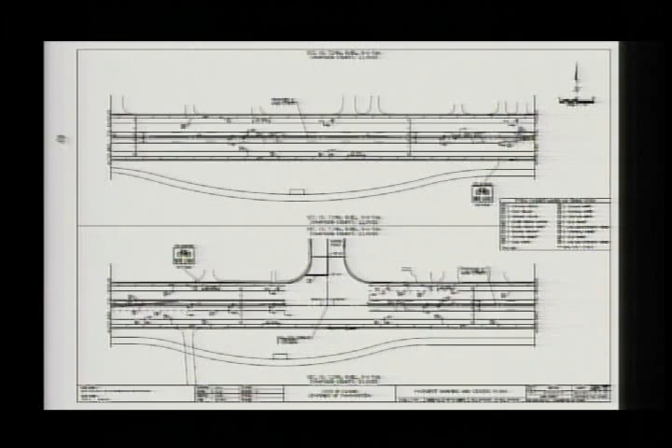We got a couple of bench locations here that we're providing as part of the construction. Actually, the Park District is paying for 3 foot of the width of this, so we can get an 8-foot wide path in there. IDOT will only pay for 5 foot, and the Park District has agreed to pay for 3 foot there. Then we're carrying the buffered bike lanes all the way through.

And then when we get close to Dodson, we still got a little buffer, but those buffers get narrower and narrower. So we're basically back to pretty much the bike lanes and the 3-lane section. And then as you get east of Scottswood here, the 3-lane section goes away. We've got a striped median east of Dodson, and it's basically back to 2-lane, and the bikes will share the lanes out to University. And that's not in the city, so I haven't done anything with that yet.

If the Kickapoo Trail is built, this has the potential of providing connection to that. Is that not correct? Well, one potential connection's at Smith Road, because the rails end west of Smith Road. And so if the trail would start there, you could actually go up Smith Road. We'd probably have to do shared lanes on Smith Road because it's not wide enough to put a bike lane or side path in. So they would go up Smith Road and catch it there.

The other alternative, as you go out farther east on Main Street, where Main Street goes straight and it curves around to University Avenue, there might be a possibility of going straight on out Main Street and going in through Tapman subdivision or the industrial park there, and tying into it that way. We'd have to work some kind of deal with the industrial park, but that'd be a possibility. I know that's a long way off, but that would be absolutely thrilling to be able to bicycle through Urbana and access the Kickapoo. Sure. Yeah.

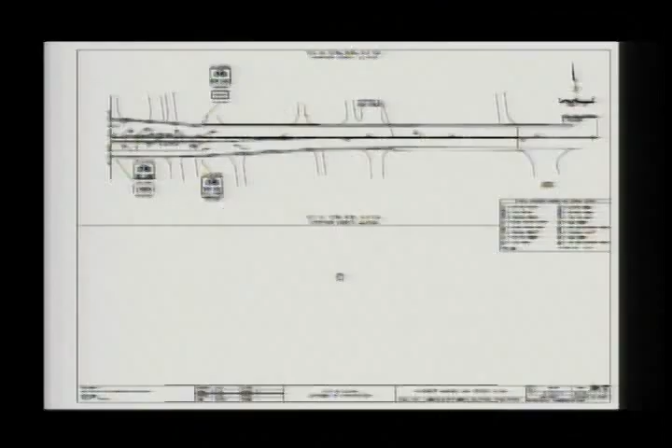It's a lot of information. I apologize for the quality of those plan sheets, but I had about 200 of them, and I had to pick out 10 or 15 that tried to represent what was going on in the project. There are some changes from what was proposed in the original ITEP based on some of the decisions made during design. And there's probably some things we can still look at as we go into construction as far as lane widths and things like that if we want to make some shifts. Any other questions or comments for Gail? Cynthia first. We'll go this way.

Well, I'm thrilled, absolutely thrilled that we're going to have this project done so soon. The only comment I would make is in those locations where we do not have bus routes or significant truck traffic, 10-foot lanes seem reasonable to me in slow traffic. I don't know all of your dimensions. But in those places where we can give any extra space to bike lanes by narrowing that down, I think that's a... Yeah, Main Street has buses all the way.

This whole stretch has buses. They come off of Broadway, they turn left, they go west. They don't go eastbound except east of Broadway. They turn east and they go all the way out to the end. So this is a bus route the whole stretch. Broadway's a bus route also. Which is why I made that comment. And buses have to have at least 11 feet. In looking at lane widths, that all has to be taken into consideration. One of the things mentioned was going to a narrow turn lane. That's not a problem, except when buses are making that turn, they take a lot of room too. So we can look at all of that.